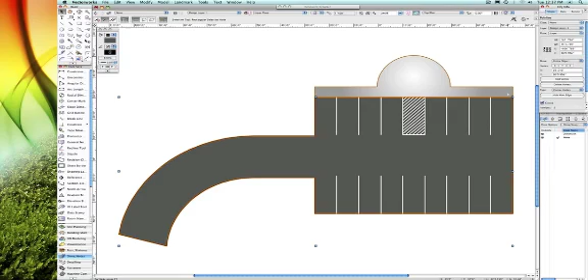As a part of the expanded combination of 2D and 3D workflows, the full representation of our 2D planar shapes in 3D space now enables us to view our ideas and analyze them for size and shape as we continue to build our spaces.

Now in Landmark 2011, not only will our 2D shapes, such as colors, gradients, and hatches, maintain their full attributes in 3D, but notice as the dimensions I place on these objects while in a 3D view stay with this drawing as we return to a 2D view.

Continuing with this example, we'll use the new push-pull tool to extrude a shape from a 2D object, such as this proposed walk and overlook. Notice that I can set it to take on a typical 6-inch curb height.

Exploring the design becomes easier in Landmark 2011, as we can use the new Extract Planar Object tool to acquire just the geometry from this face. And now I'll move it up into a position 8 feet above the walk.

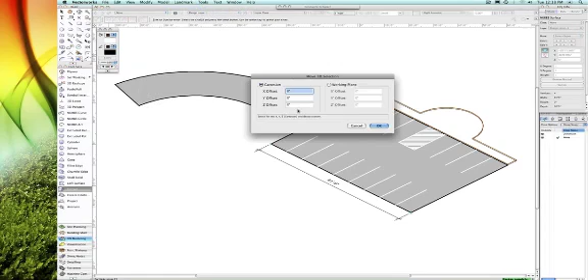From here we can study how the idea of an overhead structure works with our overlook, and continue our site design in both 2D and 3D to see where the idea of the overlook and its structure may go.

With the introduction of the new existing tree tool, creating and working with tree preservation plans by documenting existing trees and other vegetation is now easier than ever.

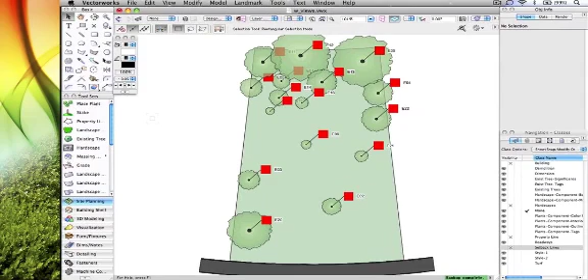As with many site design projects, it's likely that the site development will affect the existing plant material, and the action comments choices within the existing tree tool can better reflect this in the proposed landscape plan.

Symbols can also be customized to reflect a proposed action for a particular tree through the 2D properties palette.

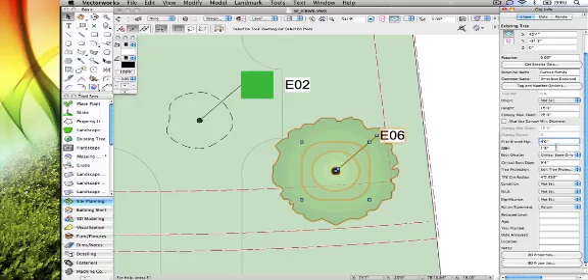Whether displaying the existing tree's critical root zone and related protection zone, or documenting the tree's diameter at breast height, or DBH, both plan graphics and data can go to work for us in our plans and reports.

And of course, the existing tree objects wouldn't be complete if they didn't have 3D representation. The 3D representation of these trees can be modified to more closely approximate the actual canopy provided by the tree, and can then be used to further study the site for any other recommendations.

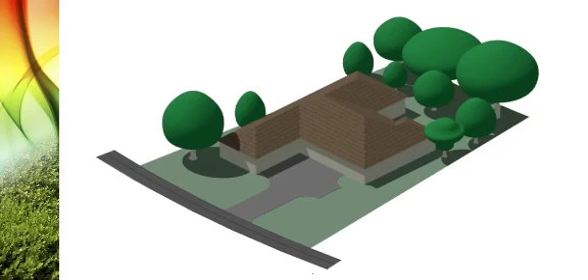So now let's look at the hardscape object. This has been a favorite in Vectorworks Landmark, and in 2011 hardscapes have become even easier and more informative. As we select this driveway hardscape and review its settings, you'll notice one exciting improvement is component classing.

Now with component classing, designers can assign classes for the hardscape's tag, its border joints, and its main area joints, expanding on the ability to assign classes to the main and border areas. This of course helps to more fully represent the hardscape in 2D and 3D views.

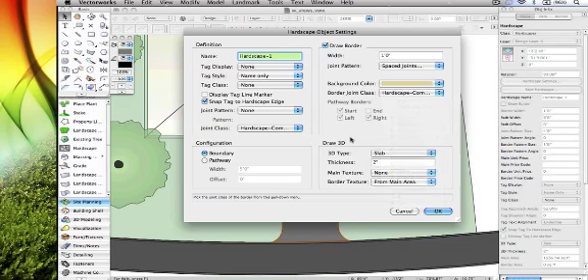And now if we look at the Object Info palette, you'll see some additional information. The hardscape properties now reports footprint area, main perimeter, and footprint perimeter. Additional information that'll aid in further quantifying your materials.

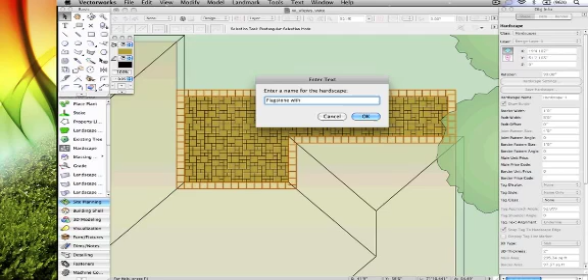And another new feature of the hardscape tool is the concept of saving hardscapes as a resource. So in this example, let's see how we can use this feature to make a design decision easier. The homeowner has requested a similar paving pattern for their patio and their driveway.

So since the patio hardscape has been saved as a resource, we can simply drag the saved hardscape from the resource browser onto the proposed hardscape and instantly see the result.

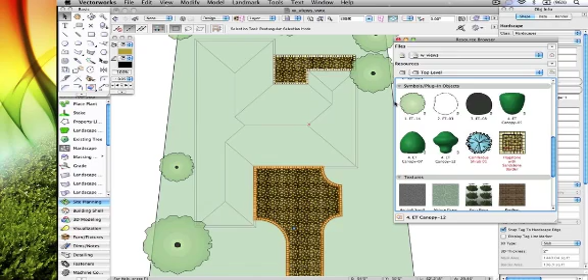And yet another option is to drag the saved hardscape into an area of a proposed paver surface and then reshape the hardscape to conform to the designed shape. It's just that easy.

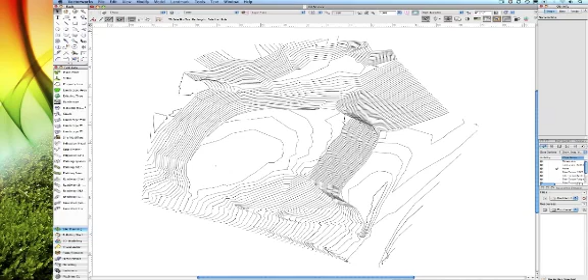The Digital Terrain Model, or DTM, is already the tool most designers appreciate for making their projects come to life with its 3D representation and its ability to provide accurate quantification of proposed cut and fill.

So let's see how Vectorworks Landmark 2011 delivers more site modeling functionality to further meet these needs. For starters, being able to distinguish existing from proposed contours is made easier with the ability to choose different colors for existing and proposed major and minor contour lines.

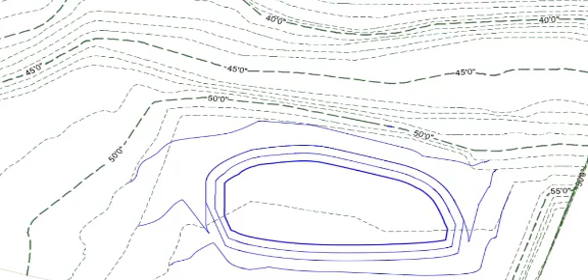In this example, the existing major and minor contours are shown in green, while the proposed major and minor contours are blue. And while we're talking about the visual display of the site model, one little gem worth mentioning is how the site model can now take on 2D attributes, like the willow green color we see here.

With Landmark 2011, designers can now use color to illustrate even more slope ranges than before, and can now emulate a typical slope analysis, coloring the slopes between contours.

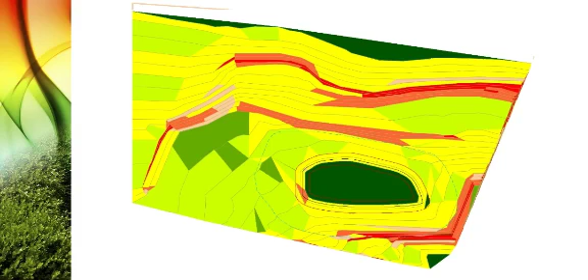Other color graphic settings can be utilized to study where a site's net cut and fill will take place in both 2D and 3D.

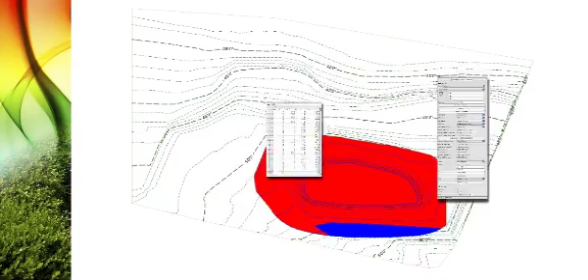We can see here where red has been chosen to represent cuts in site grading, and blue is chosen to designate the areas of fill. Users will now be able to generate reports in the form of worksheets and text files to verify in more detail how much cut and how much fill will be generated by any proposed work on the site.

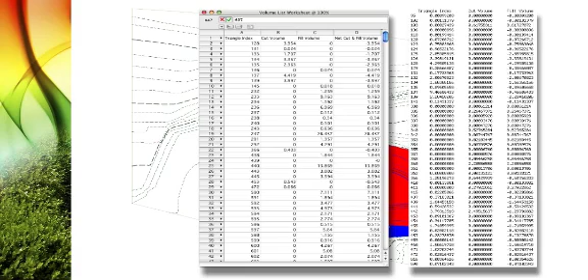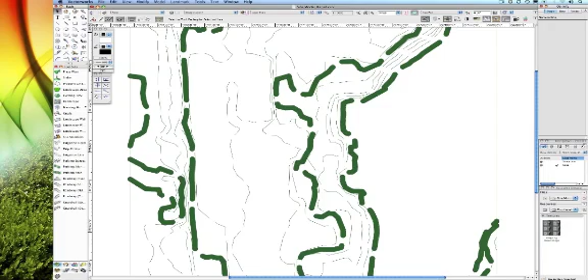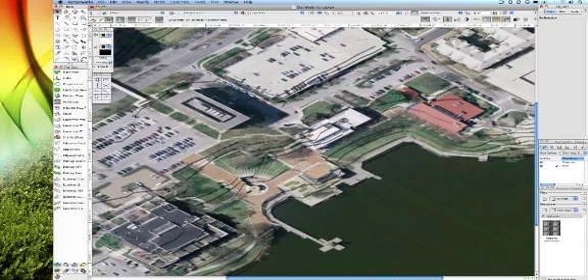Additionally, the ability to see this data mapped out on the site plan can help identify where soil volumes are changing. Another exciting new feature of the site model is the ability to map images directly onto the TIN surface of the model without having to convert the model to a mesh. As we see in this example, the DTM, whether generated from points or contour lines, can now be rendered with a chosen image. This will certainly help in evaluating both existing site conditions as well as any proposed work on the site.

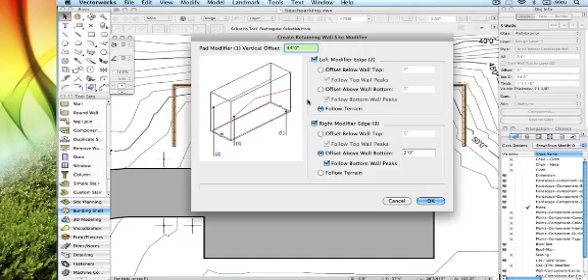And since we've been talking about the site model, it seems only fitting to now present our new site modifying objects, starting with a new feature, Create a Retaining Wall Site Modifier. This feature can more accurately modify a site model by involving 3 site modifiers related to the proposed wall object. So let's see what's up.

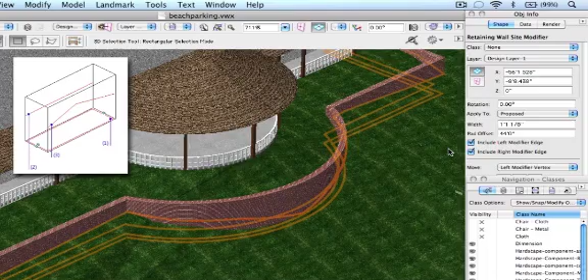In this example, a proposed wall is selected and referenced when choosing to create retaining wall site modifier. The first modifier helps to establish the bottom of the retaining wall, and the other 2 establish the proposed grade on either side of the wall.

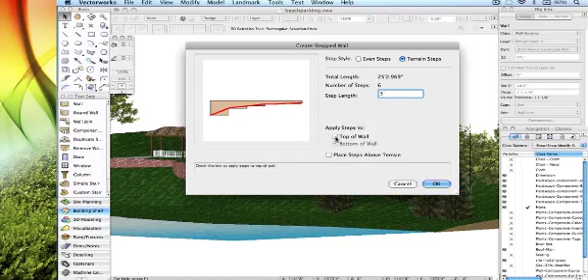Users will also appreciate the Create Stepped Wall feature. Its options allow the designer to be more efficient with material in proposing walls that conform to changing terrain. By selecting the walls and then choosing the Create Stepped Wall command, we see where the wall can be made to step down following the terrain. Other options allow the wall to step evenly by a given dimension. Keep in mind, steps can be made on the bottom of the wall as shown, or the top, or both.

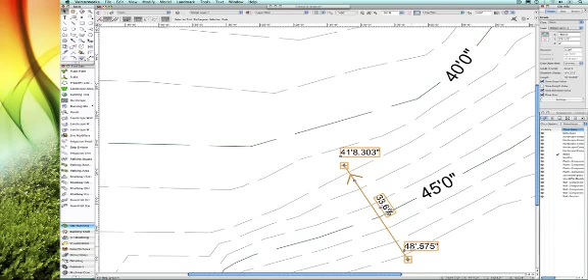And now moving on, if you like the functionality of the grade calculator, you'll love its enhancement as the new grade tool. This new tool creates an object that annotates individual slopes and can network together to show slope characteristics across a surface. The tool also modifies surface grades, which means more control over creating site drainage features such as swales.

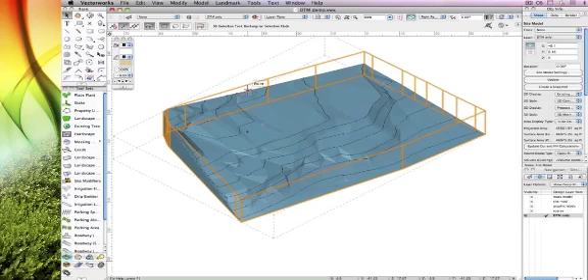In Vectorworks 2011, you can now convert 3D locus points into stake objects. For instance, here's an existing site model created using 3D loci from a survey file. Remember, the original 3D loci can be converted into stake objects, and then the stake objects can be used to create a site model. However, since the site model is already created, I'll use the original source data to create stake objects to be used as site modifiers for the proposed site model.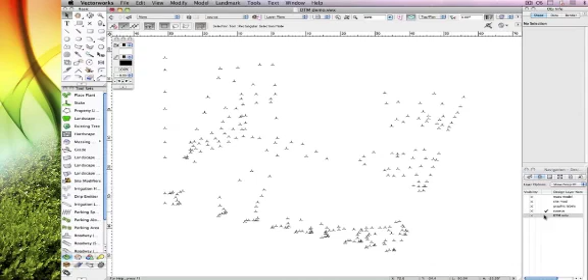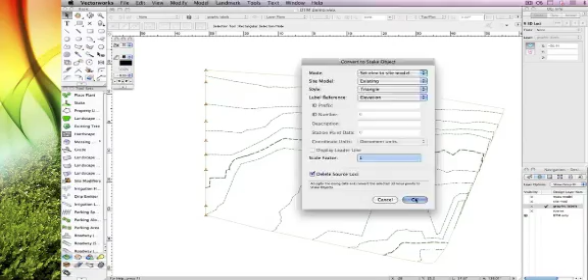So here's the original source data. Now remember, we can also use the stake objects to label points on the site model. You could do this by selecting the desired 3D loci, then go to Modify, Convert, Stake Objects from 3D Locus. For labeling purposes, I'll choose Set Elevation to Site Model for the mode, so that the elevation of each stake object is displayed. Now choose a label reference, site model, and style, and then click OK. Notice the 3D loci have been changed to stake objects, each showing its corresponding elevation.

Another new feature that'll help us do our job better, faster, and easier is a new resource we call Text Style. Here's an example where we can make the style of text in this detail consistent with the other details by creating a text style resource.

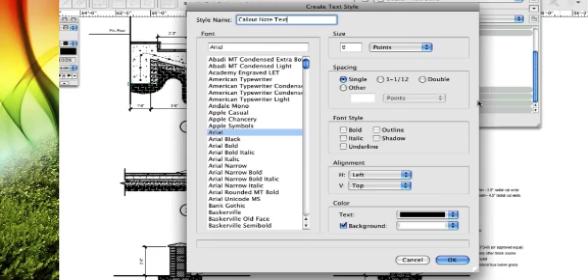In creating a text style resource, you'll set the text font, size, style, alignment, and color, and name it as a discrete text style, which can then be saved in the resource browser. To use this feature, either select the text style from the Object Info palette or simply drag and drop a text style onto a text block in your drawing.

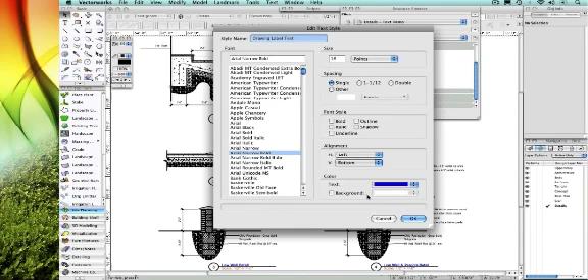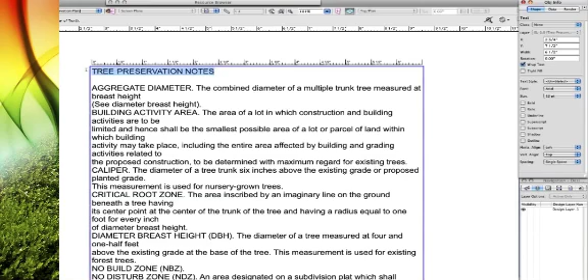Editing a text style is easier too, since text styles behave like symbols. Once we change the color and size, for example, all the text carrying that previous style updates to the new style. An additional text editing feature is Perfect Preview Text Editing. With this new feature, you'll see exactly how the text will be placed and printed after you're done editing and before you print. And as with most word processing programs, you can now fully justify your text by selecting this option from the pull-down in the Object Info palette.

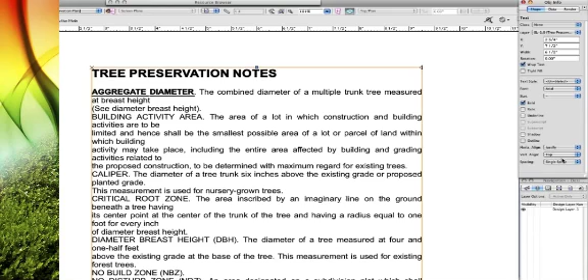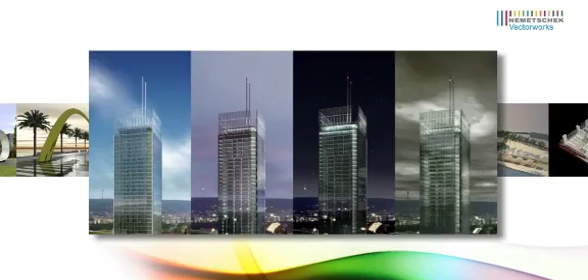Okay, so I've saved one of the best for last. As you probably know, Renderworks in 2010 allowed you to produce some very nice renderings, as you can see here. But many of you asked for more. You asked for faster rendering capabilities, and you asked for higher quality, more realistic images. And you wondered if it could be made easier to use. And so we thought, why not? So after hearing your requests, we didn't just improve the old rendering capabilities.

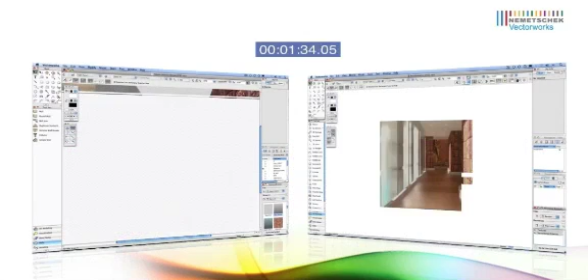We started from scratch with a whole new rendering engine, Cinema 4D. Now Renderworks is better than even we thought it could be. Here, watch this. The speed's obviously there, in this case about 5 to 7 times faster. And the quality, yes, it's there too. And you'll be surprised at the improved control of both shaders and light.

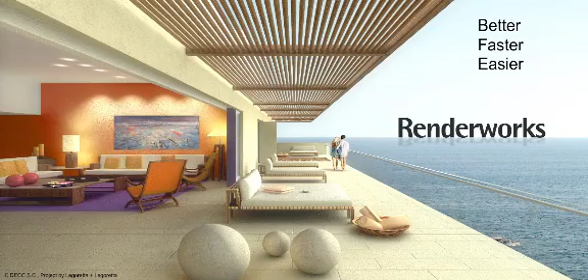As I said earlier, and I'm sure you'll agree, the development team has been hard at work this year, and it shows. Vectorworks Landmark 2011 delivers some really exciting new tools and features that are sure to make your site design and modeling experience easier than ever.